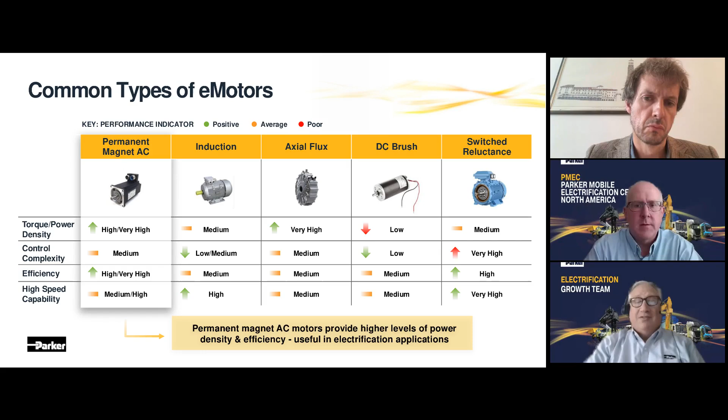Of course, one of the trade-offs is they tend to be more costly than induction motors or DC brushed, but they are probably the most prevalent type of motor we use. And there are some things in the topology of the motor that are considerations too, that we'll talk a little bit about on the following slide.

So when we talk about these mobile motors, there are different frame sizes, and we typically catalog our motors by the external OD. And of course, from a design standpoint, one of the critical considerations besides torque and speed capability is envelope. And we're often looking at very tight envelopes for electrified machines.

So we typically have two choices. We can achieve torque and speed with a lot of different combinations, both diameter, length of stacks or number of winding stacks, also the type of winding. So there's a lot of different variables in motor selection.

From a Parker motor standpoint, our GVM, which we've had out for about 14 years, we have three frame sizes: 142 millimeter, 210, 310. Most of our ePump applications are satisfied by a 142 or a 210. There are some big applications that require a 310 millimeter, but that's a lot of motor.

Now, each one of these frame sizes has up to 6 lengths per each diameter, and then a number of motor windings. So a lot of considerations when you select a motor, and there's thermal characteristics along with that, upper speed operation, low speed operation. So lots of things for the design engineer to look into.

And then obviously on the electrical side, these motors can be wound for either low voltage, 24, 48, 96, or high voltage, which typically is 650 nominal and normally about 800 volts DC today for most of our ePump applications. You can get your lots of frame lengths, lots of stack lengths, different windings can achieve the same speed and torque specs. So you have to understand a little bit about what your criteria is for getting a successful application of a motor.

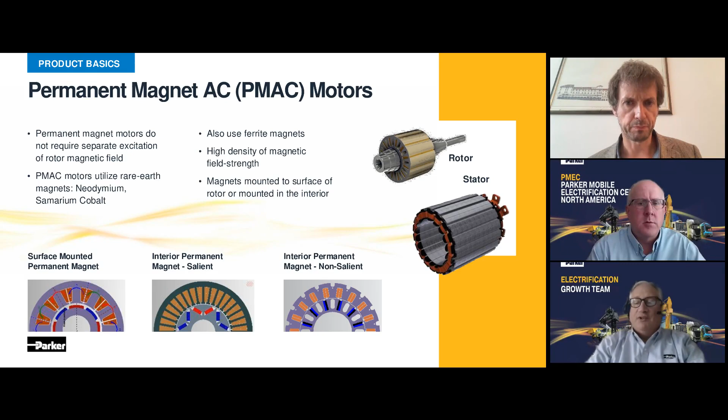So when we look at ePump selections, obviously we're not running at 7,000 RPM. We're typically running at 2,500 or 2,000 or 3,000. So there are different things in the motor considerations that the application engineers have to look at. Andy, I'll pass it over to you.

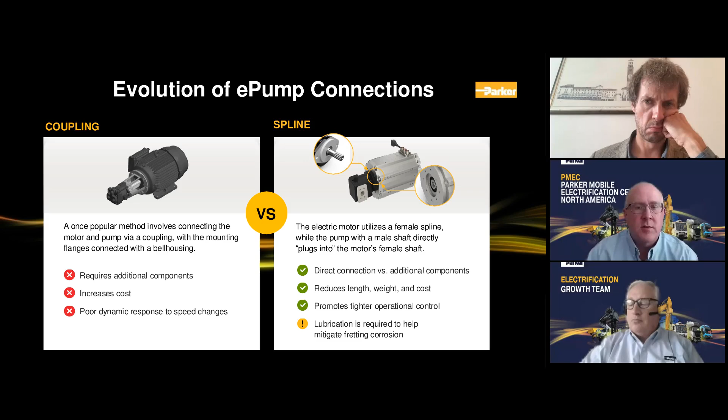A direct male to female spline connection, or the close coupled option, is a better choice here, and it's also going to give you tighter operational control. I'll go into it a little bit. The warning with the spline connection is that lubrication is required. You do have metal to metal contact, and that lubrication is crucial to the performance of the ePump.

But in electrified mobile equipment, you're going to want to accelerate and decelerate that electric motor to match the flow output from your ePump to your system's requirements, and you're going to want to do that in milliseconds. So having the direct spline connection gives you tighter dynamic response and the tighter operational control that's very important in these applications.

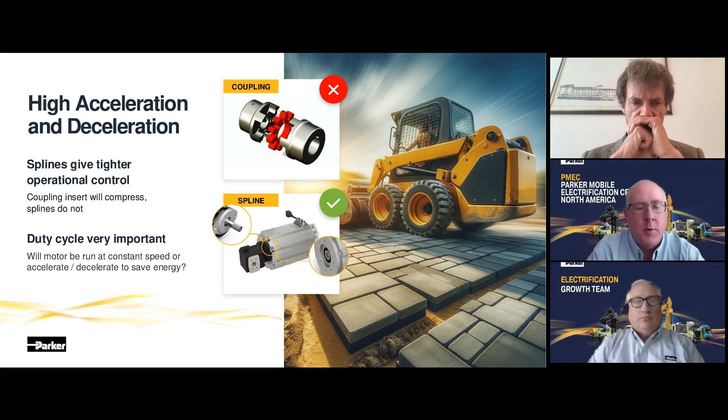With the spline shaft, there are some things you need to consider in your selection criteria. One is the spline tolerances and fit. You want to make sure the pump and motor are matched dimensionally and tolerance-wise, and that proper alignment occurs during assembly, so you don't get binding, drag, or premature wear. Also, shaft metallurgy and heat treatment are important to make sure they're matched to each other, so the shaft isn't under or over heat treated, which could cause it or the mating component to fail prematurely.

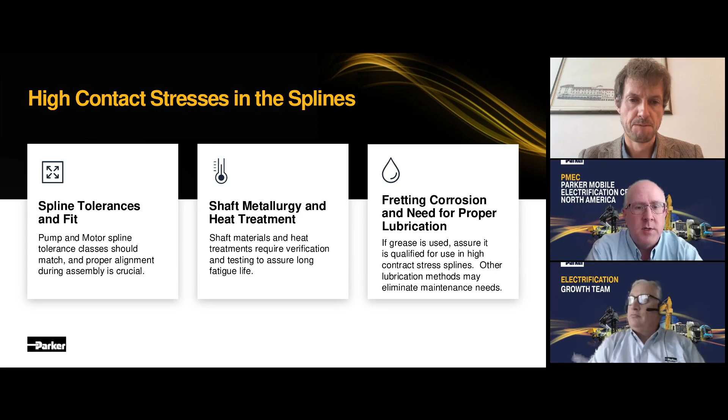The last bullet is really the important one: fretting corrosion. There's a need for proper lubrication to prevent fretting corrosion in the spline arrangement. Fretting corrosion is, in essence, a failure mode experienced in areas of high contact stress where vibration is occurring.

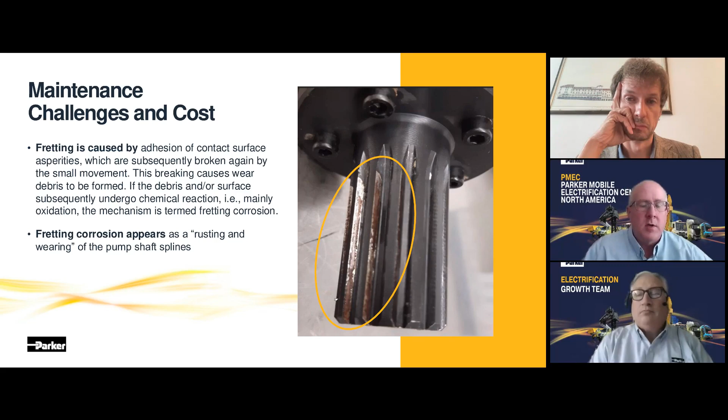As Rich alluded to earlier, one of the challenges with maintenance, and why you want the splines to last a long time, is that the ePump is often buried deep inside the machine due to the layout and the need to fit so much in a small package. We've had stories from certain OEMs where it's taken many hours to remove the ePump from the machine, do the required maintenance, and reassemble it back into the machine. That's downtime that you and your customers don't want or need, and it can be avoided by proper spline lubrication.

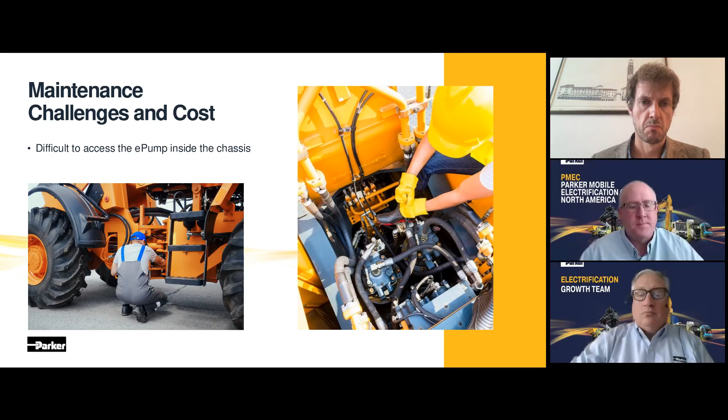So what we're proposing to the market is a three-phased approach to spline lubrication: good, better, and best solutions. The good is grease. Grease is a very good lubricator, and the right, proper grease will help give long life. However, not all greases are created equally, and you need to make sure you're using a grease appropriate for the speed and temperature range it will be subjected to. Even the best grease will need to be replaced over time, any greased location has to be re-greased at some interval, whether that's 6 months, 2 years, or 3 years, depending on your duty cycle and application, but it's going to need some maintenance.

The better approach is a wet spline, using hydraulic oil to lubricate the splines, which we've done with our Chelsea PTOs for many years in a wet spline arrangement. It's convenient in an ePump since we already have hydraulic oil available, the pump is right there. All we need to do is remove the shaft seal from the hydraulic pump, put a special shaft seal inside the PMAC motor to seal off that cavity, and the case oil from the pump lubricates the splines.

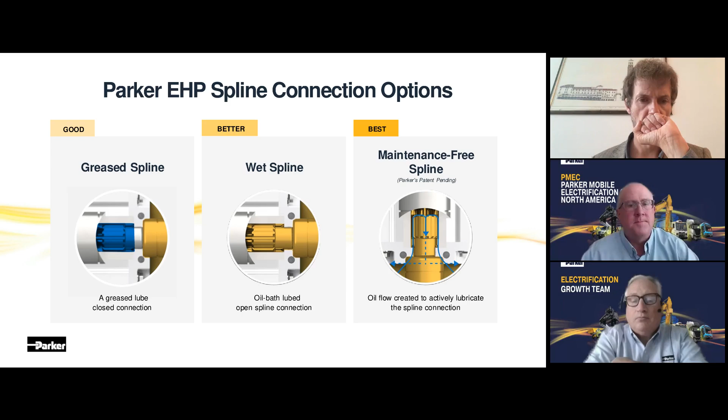So how does this work? Essentially, we remove the shaft seal from the pump, we put a special shaft seal in the PMAC motor, and then we have some special machining in the shaft of the pump. So as the shaft rotates or spins, it creates a centrifugal force that pulls the oil and any pocket of air down through the center of the shaft and replaces it with fresh case oil around the outside of the spline. So you're constantly flushing the spline connection as the shaft spins.

The nice thing about this design is no additional case drain is needed. Everything happens internal to the ePump. So to you and to your customers, it's all invisible. It all just self-lubricates as the shaft is spinning.

Our testing has shown about an 85% reduction in spline wear using this maintenance-free solution versus a grease spline. So, really good results. And again, it's a fairly straightforward approach to lubricate the splines.

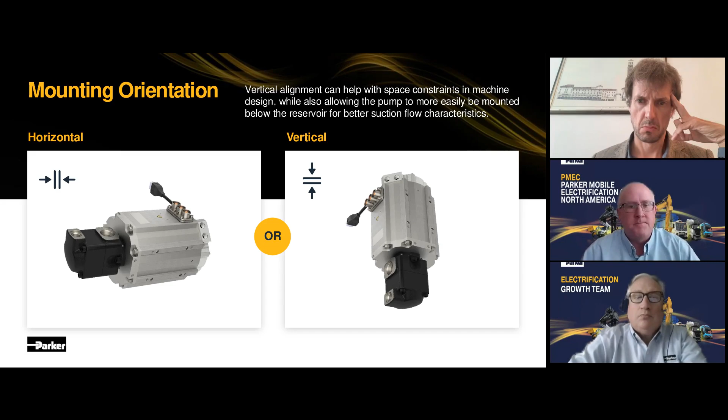All right, thank you, Andy. I was just reconfiguring my screen again.

Okay, so some other practical considerations for ePumps, and a lot of these you'll see through illustration. They're inversely proportional, and so some of the things that hydraulic engineers didn't have to worry about with traditional ICE propulsion now become a bigger deal.

And efficiency is really important, obviously, for electrified systems because the power available is finite. And of course, there's charging involved of the battery. So what's critical is utilization of the machine. And so inefficiency, of course, is one of the enemies of good efficiency.

What I would say is hydraulic systems generally have some inefficiency. It's not just the pump - if you have valve control, fluid conveyance fittings, you name it, you can have small power losses. They start to add up. So it's critical that we try to maximize efficiency when we can to try to get as much battery life as we can from that device.

One thing we find from an efficiency standpoint, and we'll show a nice illustration of this, is kind of the dividing line - high duty cycles, high pressure, versus lower duty cycles, lower pressure. And that'll very often drive the decision for what kind of pump you want to use.

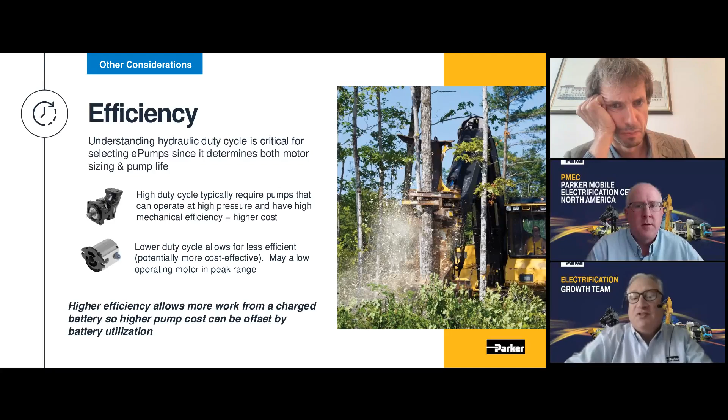So we tell people, pick a really good pump selection because over 5, 10, 20 years of operation of that machine, those costs due to poor efficiency really add up. So it may require you get a better pump, and we'll define what better means, to offset this utilization and try to maximize it. And of course, the other side of this is noise, and noise, of course, is very subjective.

In the world of diesel engines, noise really wasn't the biggest consideration. But we see this time and time again: you go to an electric drivetrain, and now all the auxiliary equipment becomes the most annoying thing on the machine. Whether it's a hydraulic pump, an air compressor, or a water pump, these things become much more important for the machine builder.

So once again, there's these inverse relationships. Pumps with lower noise are typically less efficient and better suited for low duty cycles, things like steering or maybe a lift that only operates a few times a day. And of course, you get piston pumps, which are very efficient, but also noisier.

We talk a lot about sound quality because we talk about decibels, but also you have to look at frequency and the combination of the two and how the sound waves are emanating. Things like shrouding can affect noise. The operating speed of the pump has a huge effect for the hydraulic pump. Any kind of dampening we can use, let's say motor mounts, pump inlet conditions.

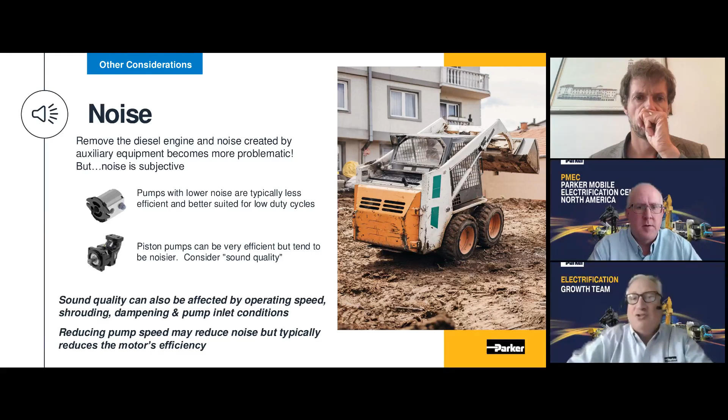We tell people you can reduce the pump speed, but then you might be operating at a point where the motor's less efficient, and you may have to then upsize to a bigger pump, which costs more money. So there's all these trade-offs with ePumps and electrification that generally aren't true for diesel engine applications. So I like this graph.

This is this inverse relationship between noise and efficiency. And I think what stands out on the top line, which is your decibel line, your diesel engines are operating in the 100 dB range. And when they're running, you don't really care about much else.

But you take that diesel engine out, and all of a sudden, let's say we have a bent axis pump, very high performance pump, but it may operate in the high 80s, low 90 dB range, depending on the speeds. If you go to the other end of this continuum, you have the helicoidal pumps, very quiet, 50 dB, throughout a lot of speed ranges.

And then we kind of work up on the noise continuum to vane pumps, gear pumps, and there's a little bit of a gray area between those two, depending on the construction of those pumps. But then your piston pumps and your bent axis are generally the noisier of the two. But then again, there's frequency considerations, so you have to measure out the amplitude versus the frequency of the noise to make a good decision.

On the other axis, in this continuum, is efficiency. So of course, the most quiet pumps tend to be less efficient. The noisiest pumps tend to be the most efficient. And you could also overlay cost. Not always, but you can pretty much assume that you pay for efficiency. You may also pay for lower noise, right?

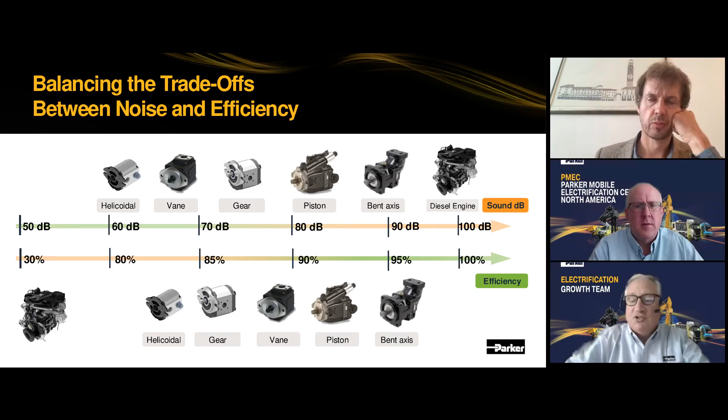So sizing, once again, it's a little daunting. I think hydraulic pump engineers, if you grew up with hydraulics, know pumps inside out, and all the characteristics at the different speed ratings, pressure ratings. Same is true for motor engineers, right, on the application side. But a lot of those sizing considerations have to be accounted for the ePump, because now we have the pump and the motor.

So we always start off with battery voltage. If we have a sizer tool, or you're talking to an app engineer, one of the first questions is, what's the bus voltage? Is it 650? Is it 300? Is it 96? So we typically start there. Are there any current limits that we need to consider? That's tied to voltage always.

And then, understand the application type. And what's really critical for electrified equipment that I think hydraulic engineers don't consider is duty cycle. Understanding what is continuous versus peak. What is your RMS duty cycle during the day? What's the duration of the operation? Are you running 8 hours? Are you running 2 hours? Are there a lot of pressure spikes?

Pressure spikes typically get introduced by the work at the actuation point. Not all applications have a lot of pressure spikes, but there are some that do. That drives your pump consideration. And noise tolerance.

Is this equipment in a city where there's pedestrians and other people who are really annoyed by high noise? Or is it in a remote construction site where that noise really isn't important? And so then, of course, we have to operate at speeds. We've talked about this both from the pump and the motor standpoint, that optimize efficiency and reduce noise. So once again, we have motors that can run at very high RPMs and pumps that can't.

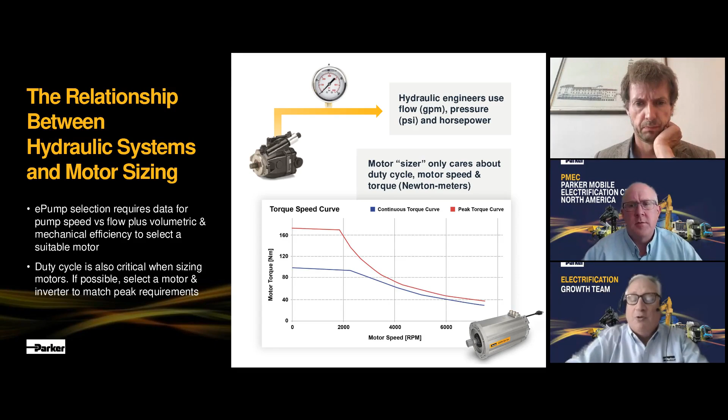Software can help interpret between those two languages, but we tell people it's always very important to understand your duty cycle, because there's a lot of cost if you size continuous, but you can actually operate in peak. Because if you can operate in peak, you can downsize the motor. The pump doesn't really care so much. The pump's kind of designed to run in continuous mode, but motors have a different design criteria. It's also based on thermal conditions, how much cooling flow. So those are all important considerations for sizing.

So we do have software tools. For example, this one is web-based. It is somewhat limited, right, because it is an open product, but we categorize applications rather than hoping that people know what types of pumps are best suited, right? We break this down into three general applications: lower noise, pretty easy to understand; heavy duty, also pretty easy to understand; and then balanced. Balanced is typically moderate duty cycles, 20 to 40%, pressures below, let's say 200 bar generally, or 3,200, 3,300 psi.

And so a pump motor sizer, and there are different products. There is an ePump sizer, and a motor sizer, but an ePump sizer will take your application, take your flow and pressure data, convert it to torque and speed. It'll then give you some best fit pump selections, and it could be based on ranking. Maybe a vane pump is the first choice and a gear pump is second, and on and on. And then once you select the pump and it picks the right pump displacement that can operate where it needs to operate, it'll select the best fit motor. So take the best fit frame and length and winding for that application. It'll plot out then torque speed.

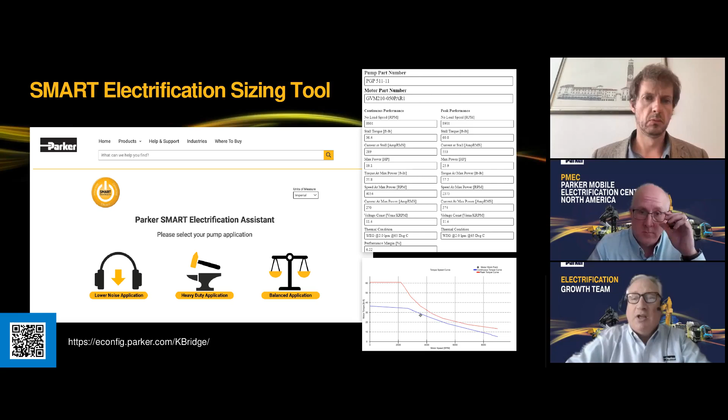So it gives you some information, gives you kind of the basis of an ePump part number. And it's not a foolproof tool, but it gets you very close and allows you to speak to an application engineer to get more information. But there are other considerations on the motor side that aren't always considered here, that take somebody sometimes a little more experience on doing applications to help you. But this is a great start, especially for helping pick the motors and get you in the right area of the pumps too. So Andy, I'm going to pass it back to you now.

Yeah, thanks again, Rich. With any manufacturer, it's important to make sure that the ePump has been properly lab tested first. I mean, obviously you want to test it on your machine, but to have that assurance that it's been lab tested, in the right orientation, across the speed and acceleration range that you need, with the right pressures and flows. So having that lab testing and the assurance that the ePump's already been tested is going to save you development time and money when implementing into your machine.

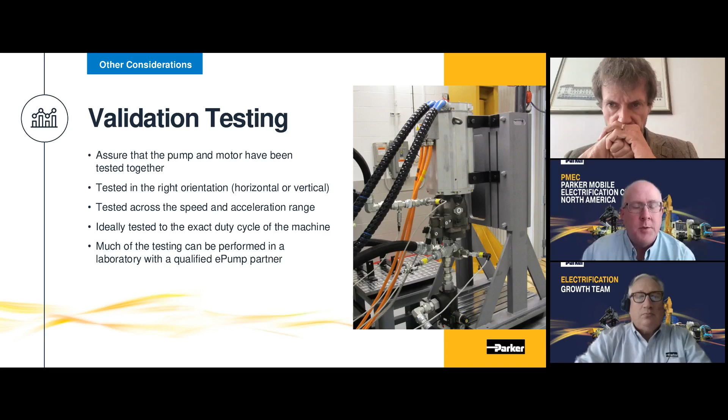At Parker, we've invested pretty heavily into our testing capabilities across the globe at a number of different sites. But I wanted to share some images from the facility I'm based in, which is in Marysville, Ohio, just outside of Columbus, and really the investment we've made into world-class testing capabilities. We can do performance, so across the operating range, sound levels. We can do performance and sound simultaneously to really map out the best criteria, the best situation for your application, and also endurance testing.

So all these different spline lubrication options, we've put them through millions and millions of test cycles to really validate the components, as well as just the interaction of the pump and the motor to make sure that are there axial radial loading from one component? How's that going to affect the bearings in the other component? And to make sure the pump and motor are a match set. We also have a lot of capabilities to mimic customer applications across a number of factors and duty cycles, and it's kind of as a service to help our customers in your electrification journey.

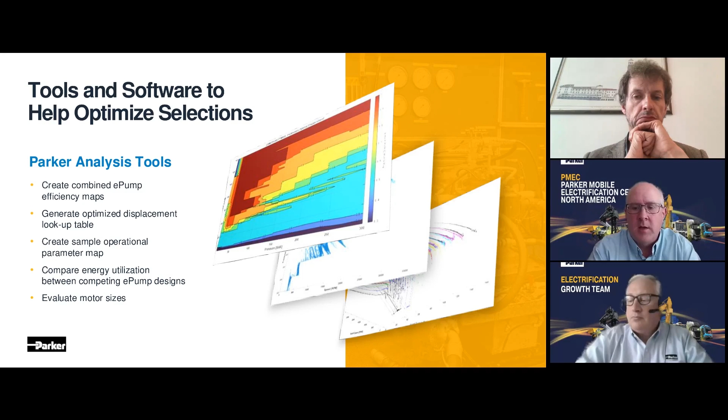And Rich explained the sizing tool that we have available on our website. Obviously, behind the scenes, we have a lot more advanced analytical tools that we can use, along with our application engineers, to really help optimize your system architecture.

Another point I want to make is not to underestimate the value of using a complete ePump from one source. Obviously you're going to save on the labor of assembling the components and the number of purchase orders you need to issue, but really you're going to make sure that you get the latest in lubrication technologies. We're continuously testing new greases. Our maintenance-free spline is only available if you buy the complete ePump because of the internal changes we need to make to the products. And you're going to get the peace of mind of having a matched pump and motor, and even extending that to the inverter and the controls. I think we like to pride ourselves that everything is designed to work together seamlessly.

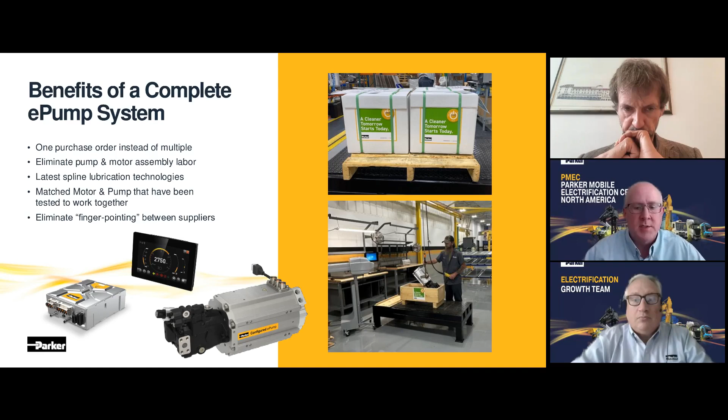To pull all this together, Parker has established a couple of mobile electrification centers. So we have our center in North America, again, in Marysville, Ohio, and in Europe it's in Offenburg, Germany. These centers' charters are really operationally to execute on putting these components together and building complete ePump systems, but also our engineering and test lab capabilities, as I outlined before, to make sure that we can help you specify the right equipment and get it tested properly before implementation into your machines.